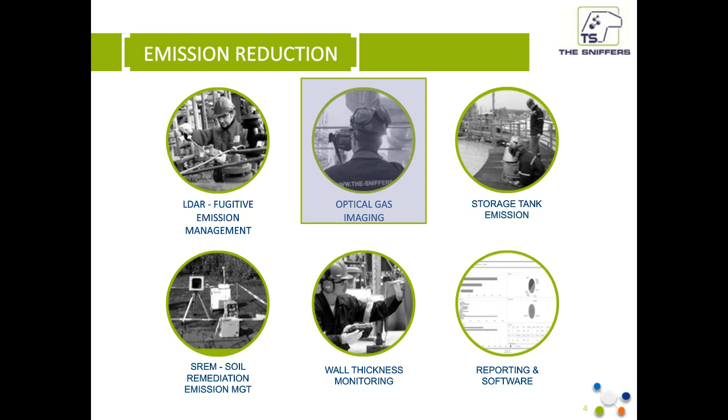Dear audience, welcome to this webinar of the Sniffers, in which we will focus on tank inspection. The Sniffers are active in different areas, such as pipeline integrity, energy savings, and emission reduction. It is in this last domain, emission reduction, that today's presentation is situated. Within the emission reduction part, optical gas imaging is just one area.

Optical gas imaging means that an infrared camera is used to perform gas leak detection. The camera makes it possible to really visualize the gas as a cloud. This provides visual evidence, and it also makes it possible to detect large leaks quickly. The camera is also often used to perform a quick scan after shutdown to quickly detect incomplete repair or inaccuracies.

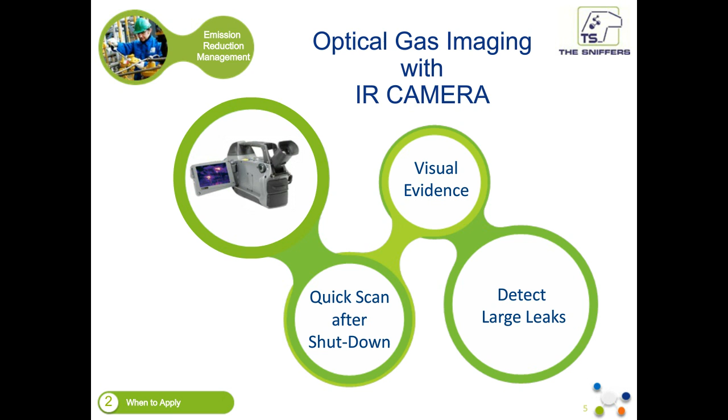What is the principle of OGI, or optical gas imaging? Our camera, the camera of the Sniffers, detects volatile organic compounds, or VOC. Most VOC absorb infrared waves. Certain wavelengths are absorbed more than others, and that's what the principle of the camera is based on. CH bonds of organic molecules have a large absorption band with high intensity around 3 to 5 micrometers. As such, this is an important wavelength window for organic compounds which are found in refineries and chemical companies.

The filter of the camera only transmits this region of the electromagnetic spectrum. It is exactly because a certain part of the infrared radiation of the background is absorbed by the gas cloud that a difference is created between the background and the gas cloud. This difference makes the leaks visible. As such, the gas leaks are visualized by the camera as dark or white clouds.

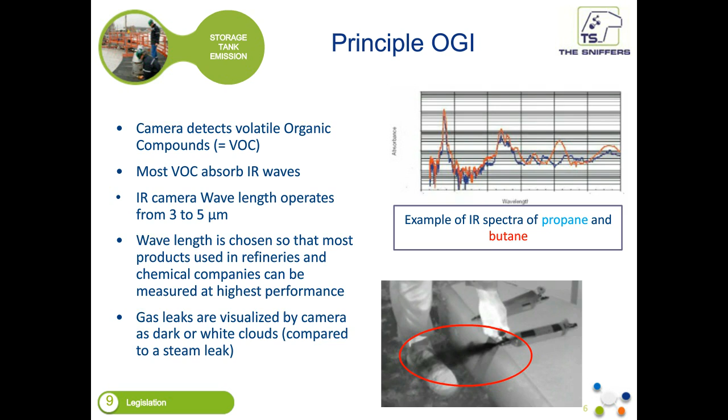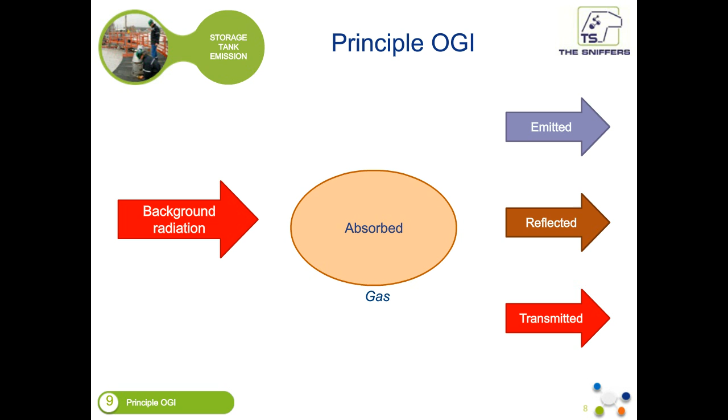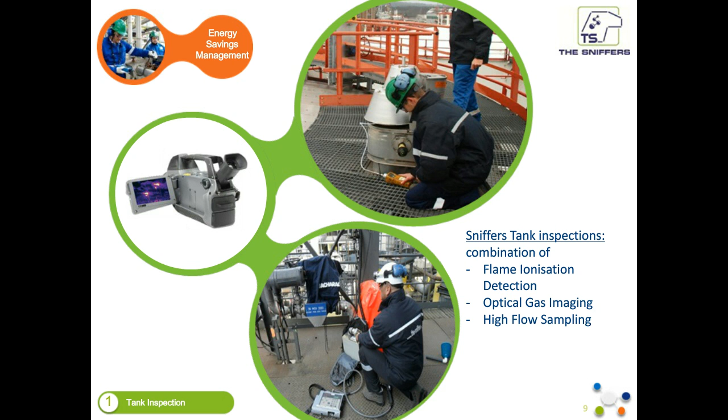Sniffers tank inspections mostly comprise a combination of flame ionization detection, optical gas imaging, and also a technique called high-flow sampling, which is actually a technique based on bagging. In the past, there were no real guidelines for the use of the camera, but recently a team sat together in the Netherlands and constructed the so-called NTA 8399. NTA stands for Nederlands Technische Afspraak, which is in English Dutch Technical Guidelines.

The NTA 8399 is a guideline for detection of diffuse VOC leaks with OGI. So it explains how the camera should be used in practice when you go to the field. It is actually not specific for tank inspection, but in the attachment it focuses on tank inspection, and it also gives an example for a tank inspection form. The Sniffers follow these guidelines during their tank inspection programs.

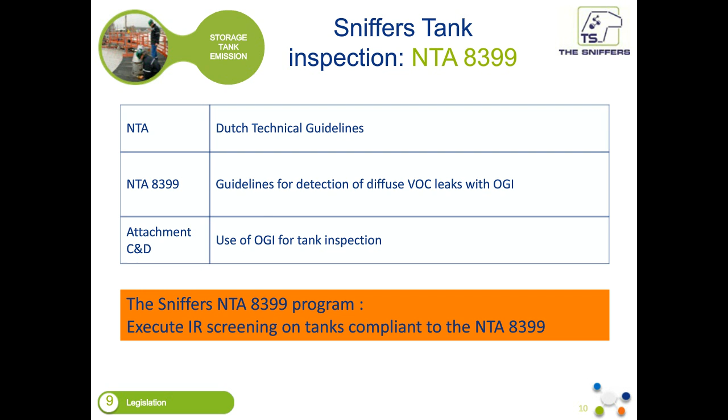So the NTA 8399 are guidelines for detection of diffuse VOC emissions with optical gas imaging, OGI. It focuses on portable, passive optical camera systems visualizing VOC in real time. Safety, environment, and loss of product are main driving forces for the application of OGI, and it is important to stress that it is a qualitative approach, not quantitative.

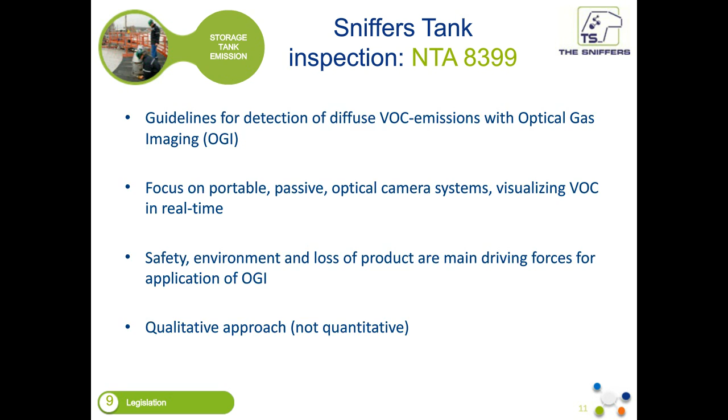Advantages of OGI on storage tanks are reduced monitoring time. You can quickly monitor several tanks, especially compared to FID monitoring, such as sniffing. You have images of registration, including date and time, which includes a provability factor. You can also reveal emission indications at unexpected locations. And there is also an important health factor, because you can monitor from a distance.

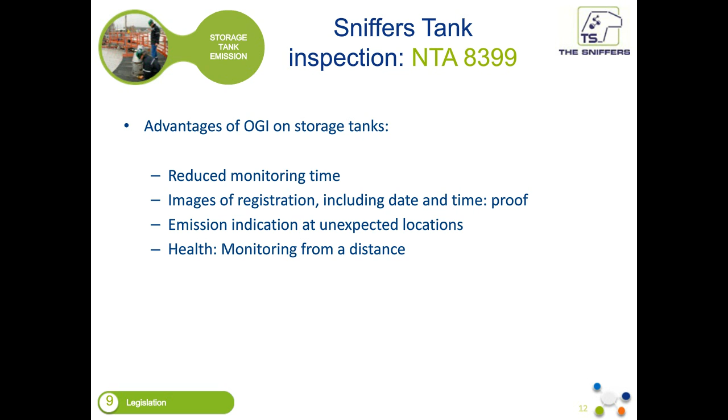So how is this Sniffers tank inspection program constructed? In the preparation phase, we request the location plan of the tanks. We request the products that are present in the tanks at the time of the measurement and also the safety data sheets. And we check whether products are measurable by OGI, so if they can be detected by the camera.

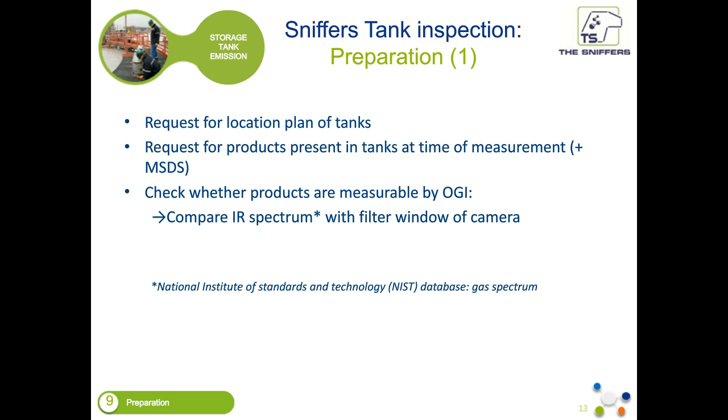We do this by looking for a spectrum of the compounds of interest in the NIST database on the internet. And we look at the window of the filter of the camera, which is between 3.2 to 3.4 micrometers. So we look if there is a strong absorption band. If that is the case, it is very likely that the compound will be detectable with the camera.

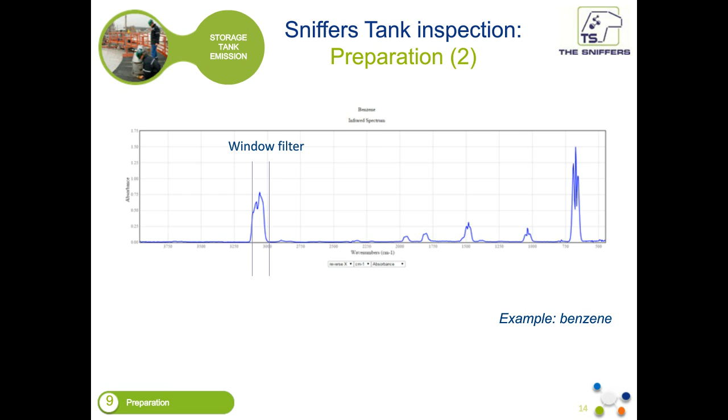How is the program executed? The tanks that are part of the scope are screened by checking all possible emission sources with the camera. When no emission indications are observed, an overview video is made of the tank roof in 3 different modes, namely the visual mode, just a movie, the normal infrared mode, and also the high sensitivity mode, which is very difficult to look at, but which makes the leak very clearly visible.

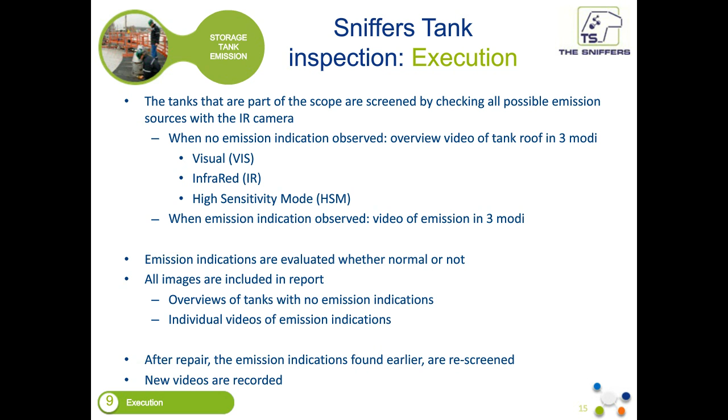When an emission indication is observed, videos are also made of this emission in the 3 different modes. Emission indications are evaluated, whether they are normal or not. All images are included in the report: overviews of tanks with no emission indications, as well as individual videos of emission indications. After repair, the emission indications which were found earlier are rescreened and new videos are recorded.

This is an example of a tank inspection form. The blue cells contain information that is collected in the preparation phase, so before the actual project. In the green cells, information is collected during the project, so on site. On this form, all the information is also collected about the sources that were screened, and it is indicated if they showed emissions or not. It is also indicated which movies correspond to which emissions, and which sources didn't show emissions.

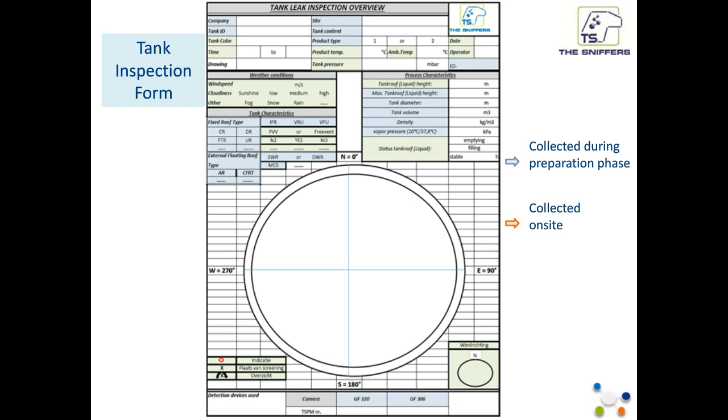Now I am briefly going to show some study cases, mainly roof inspections. Here is an example of a project which we have performed. On this tank inspection form, you can see that 5 sources were screened, and only 1 showed an emission indication, which was the red dot on the inspection form. This was a deck leg, and this is the one that is pointed towards on the pictures.

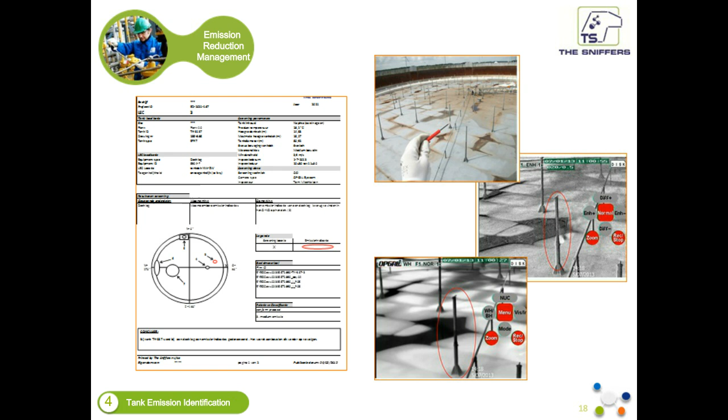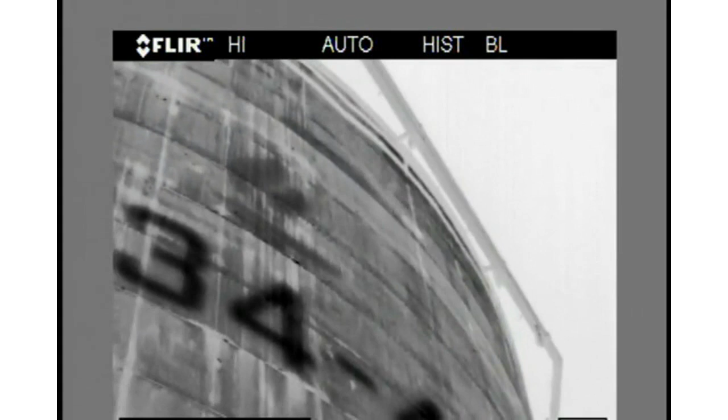Here, a clear emission is shown of an equipment on a tank. These are the type of videos that we will provide together with the report, and the names of the files are indicated on the tank inspection forms. On this video, it is clearly visible that the tank shell is leaking. You see the white clouds disappearing from the tank shell.

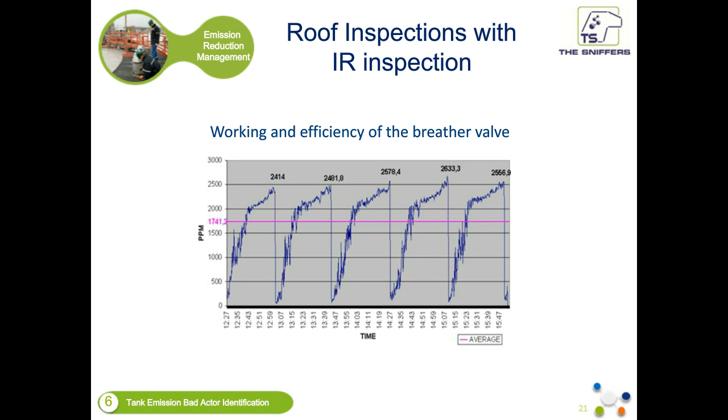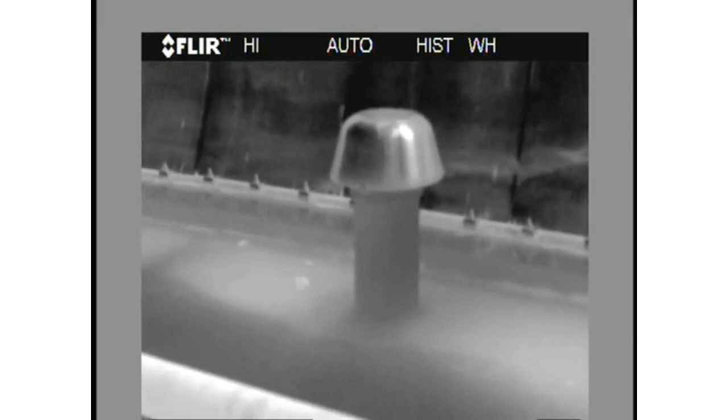In another case study, we checked the working and efficiency of a breather valve. We first measured this breather valve with an FID, and we got the profile which is shown in the slide. And this is not a properly working breather valve. The emission was also shown on an infrared video, which will be shown in the next slide. And we saw that after repair, the breather valve was only emitting when it was opening.

Also, floating roofs can be inspected with the camera without a problem. Here, different equipment types are shown. It is best if we can go on the tank, but if it's not possible, it's easy to indicate emissions from the platform.

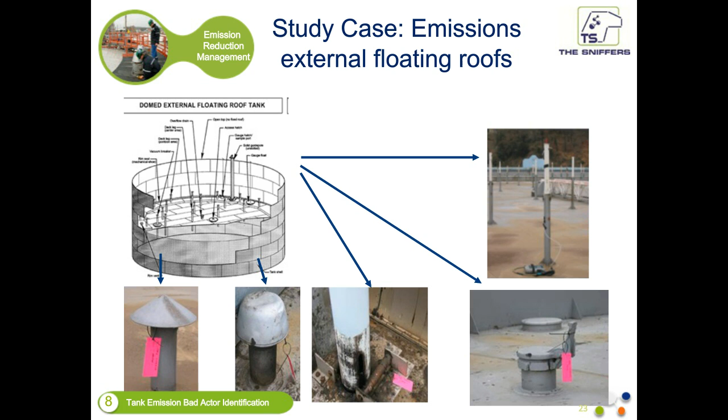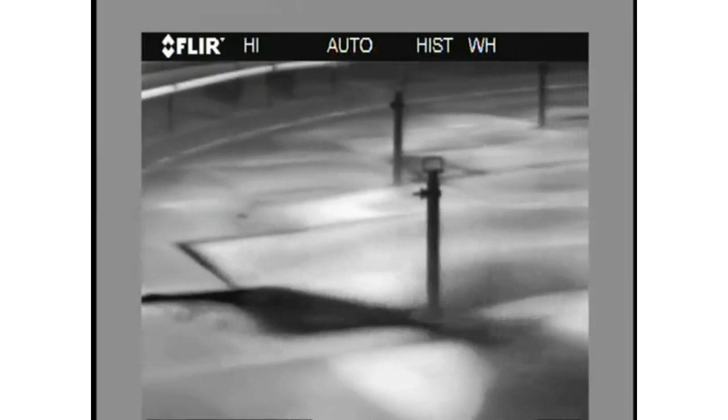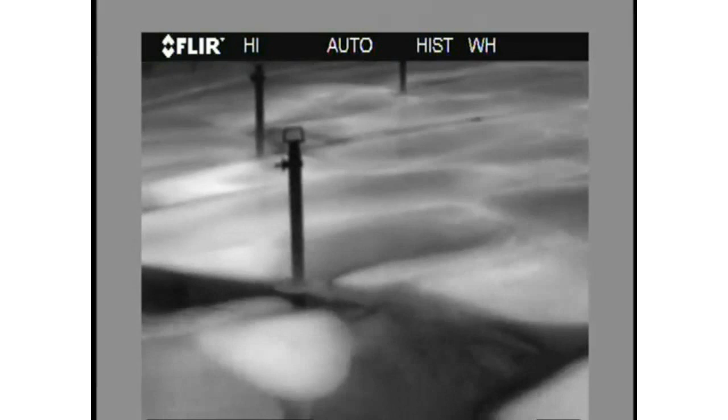What we see here is the roof, and it's welded together. And what you clearly can see is that the welding is leaking. So again, we see that the optical gas imaging camera is a very, very powerful tool to detect the leaks. With the camera, you can do a fast screening on your tanks, and you can immediately spot a lot of leaks and a lot of indications of problems.

This, for example, is a hatch of a floating roof. So it's like a floating container that's keeping the roof above the liquid. Normally it should not leak, but with the camera you can see immediately that it's leaking. This is what we call the high sensitive mode. We always film in 3 modes: the visual, the normal, and the high sensitivity mode.

What we see here is again a sealing of a tank. Again, we see the normal picture. We don't see any leaks. Now we're screening in the normal mode. We see a cloud coming up, like small leakages, and then we see the high sensitive mode, which is much better and much more fine-tuned to find leaks on tanks. So here we see nicely a smaller leak on the sealing of a floating roof tank.

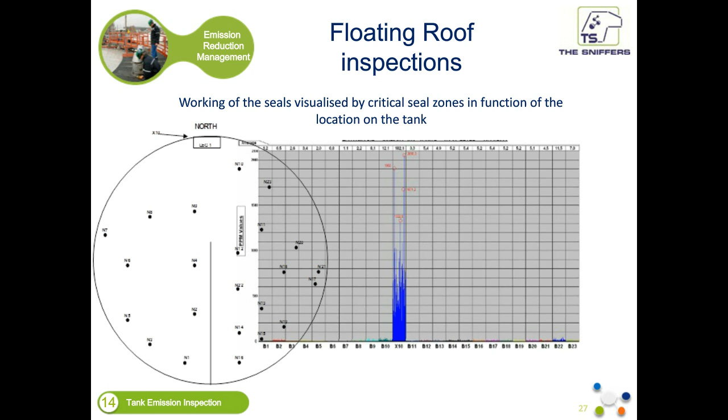In this study case, we walked around the tank with a flame ionization detector, and at a certain point we clearly saw an elevation of the concentrations on the FID, which meant that there was an emission coming from the seal of the tank. Looking with the camera at the same point, we got a clear image of how bad this emission was, which will be shown in the next video. Here it is.

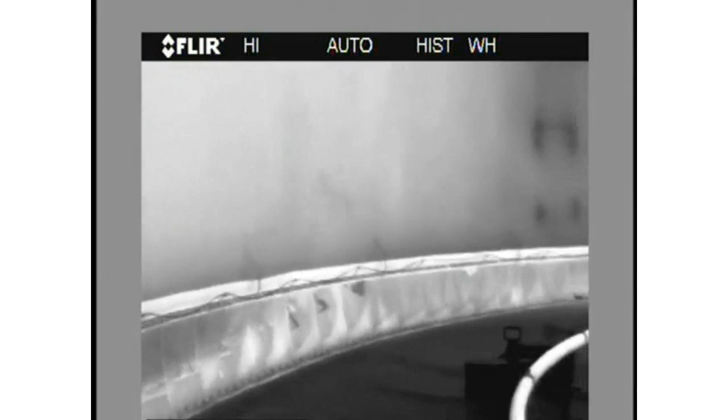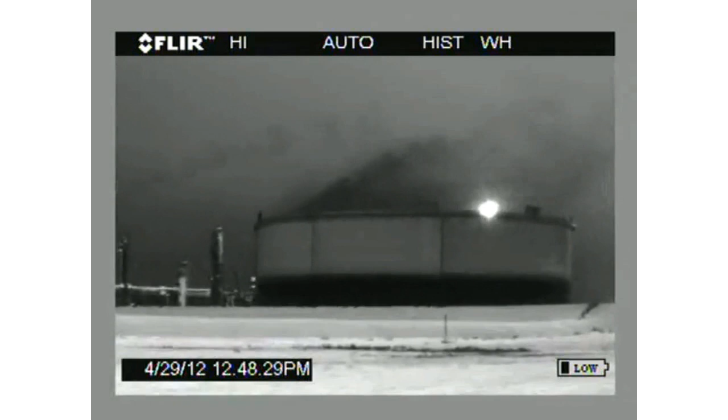In the next video, we will see a tank with a huge problem, but there was a reason for this. Some time ago, a truck was burning next to the tank, and it deformed the tank shell. But we observed that when the tank roof was at a certain height, there was no problem, but at another height, a huge emission was coming from the tank.

After the OGI, I will focus on high volume sampling or high flow sampling. This is a technique based on bagging, but the difference with vacuum bagging is that in high flow sampling, a flow is created which gently sucks the surroundings of the leaking equipment through the instrument. Mostly this technique is used after leak detection. It's not a leak detection technique because it takes too long to detect all the leaks, but it is mostly used to quantify the leaks after leak detection.

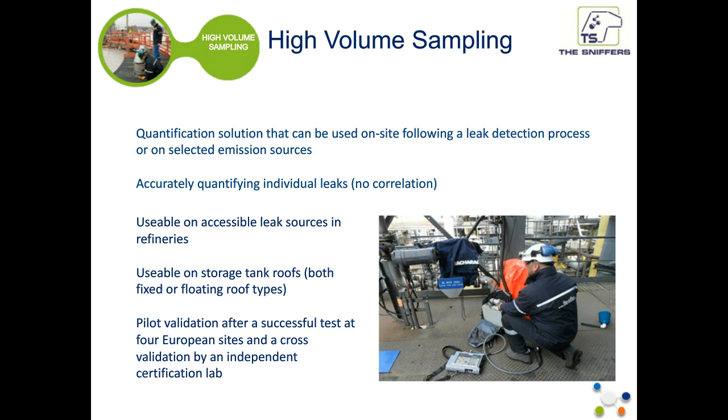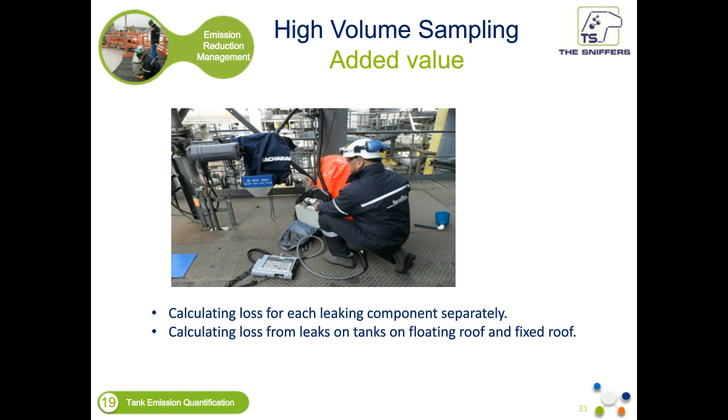The added value of high volume sampling is that losses can be calculated for each leaking component separately, and it is possible to calculate exact emission of tanks with floating roofs and fixed roofs. The method is as follows. After bagging the equipment, the leaking gas is drawn through the instrument together with some surrounding air at a certain known flow. This flow is set on the instrument, and it is important that this flow is known to be able to calculate the exact emission afterwards. So the gas leak is drawn through the instrument, and at the exhaust of the instrument we measure the concentration with a flame ionization detector.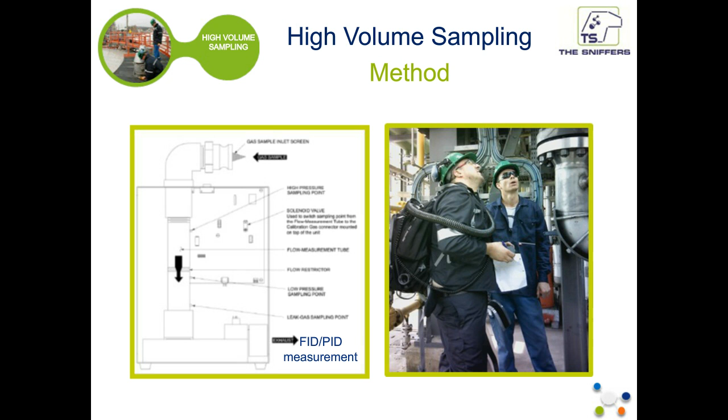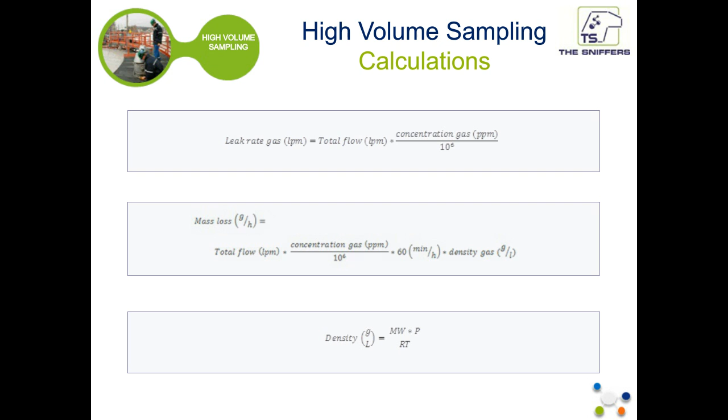If you only want to know volume-based emission losses, you can multiply the total flow which you have set on the instrument with the concentration fraction of the gas measured at the exhaust of the instrument. If you want to know mass emission, you have to multiply this volume-based emission with the density of the gas. Knowing the components which are in the vapors, you know the molecular weight, and it is easy to calculate the density. Having calculated all these details, we provide you such a report, giving you for each equipment on the tank the exact mass emission which is escaping from your tank.

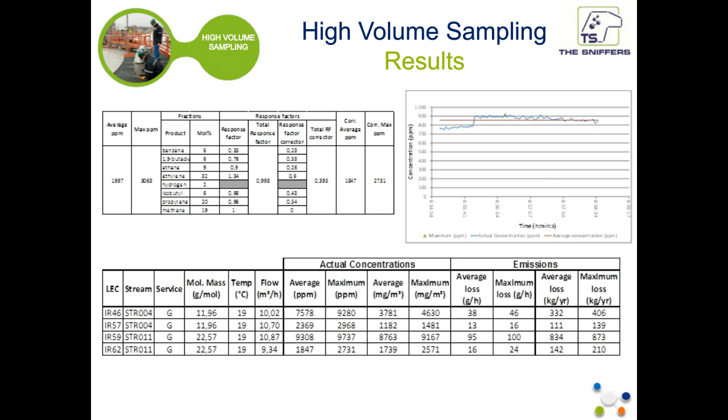So I will be telling you something about energy savings on tanks. So what are the services that the Sniffers provides for energy saving services on tanks? Well, first of all, steam loss management. We have a full program to manage your steam loss and to help you reduce your steam losses in your tank farm. Flare loss management. We have a full program again also for the flare or vent losses in the tank farm, especially for natural gas or ethylene or lighter gases.

Further, we have thermographic integrity inspections, so we do all kinds of infrared monitoring to detect level in the tanks, insulation problems, all kinds of hotspots monitoring. And of course, we also have a program for compressed air and vacuum leak detection, and also nitrogen losses. So it's a specialized ultrasound monitoring to detect all your losses in your tank farm. Of course, for every service we deliver, we have a specialized and self-built software. Everything is built in SQL, so professional, and it has no limits of data.

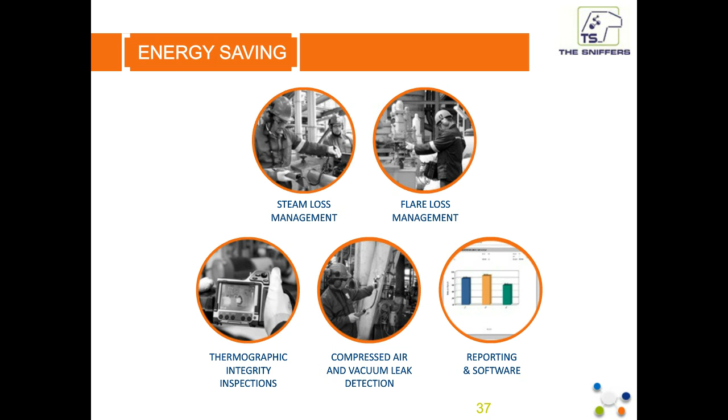We're going to start with steam losses in a tank farm. So what are steam losses? Well, steam losses are caused by defective steam traps, bypasses, process valves that start discharging, all kinds of visual leaks coming from all kinds of steam lines. So what we're trying to do is make as full and complete a monitoring program as possible to manage your steam losses in your plants.

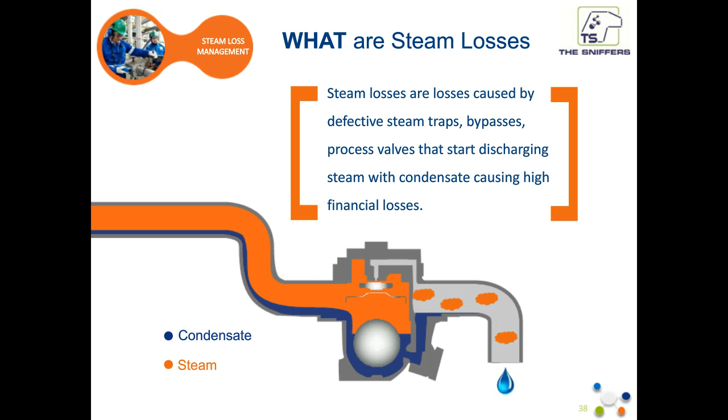So what kind of equipment are we using? Well, we are combining three techniques, three different equipments. First of all, we use the ultrasound measurements. The best way to measure a steam trap is definitely ultrasound. Easy and fast to detect internal leaks of your steam trap or your bypasses. And it makes it also possible to do a quantification.

So we know what type of steam trap it is. We know the technical specifications of the orifice in the steam trap. We know the pressure on the steam line. We know what is the type of steam trap, and so we can calculate the exact loss on the steam trap when it's defective, when it's leaking. So this is the reason why we use these ultrasound measurements.

We combine it always with temperature. We use an infrared pyrometer, and of course it gives you indication if the steam trap is cold or hot. And further, we also use a thermal camera, and the thermal camera is an extra addition. It's like a visual proof to see if there are anywhere open bypasses in the plant.

So steam traps have bypasses or larger bypasses in the process system, but also condensate lines, if they're blocked. We can screen for certain heat exchangers with steam. So all kinds of process screening and analyzing is covered.

So how do we start a program? Well, first of all, we come to your site, we collect all the data, we collect all the P&IDs of all the steam traps. We make a calculation, we make an identification, and then we start in the field. So every steam trap that we spot gets a full inventory, what kind of steam trap it is, so all the information to calculate the losses.

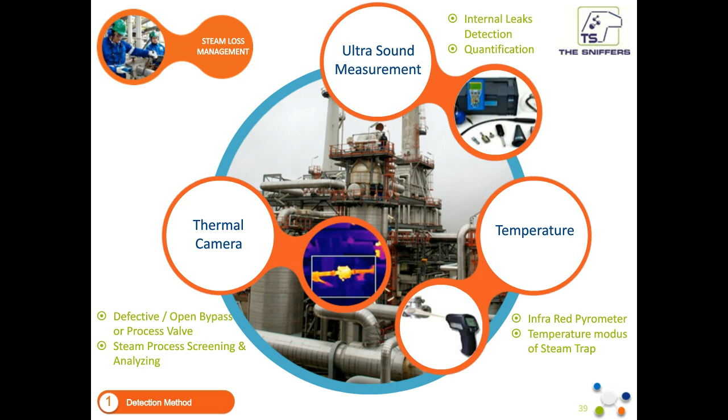Here in the next slide, we see a case study. This is about a tank farm, and it's a tank farm part of a refinery. So we see around 2,000 steam traps. This is pretty high for a tank farm. But again, in a refinery, you have bitumen, you have asphalt, so a lot of steam traps are needed to heat the tanks. So here you had around 2,000 steam traps.

And if we see the statuses, you see the status okay. This means the trap is working normally. You see not okay leaking. This means that the trap, of course, is leaking. But you have even more statuses to determine the status of the traps. You have DG, like defective gaskets. This means that the trap is leaking externally through the flange. You have cold. That means that the trap is cold and not working normally. You have out of order, valve closed, failed closed, and no status possible.

So if we look at this case study, we see around 2,000 traps, of which around 1,600 work normally. So around 80% is working fine. This is quite a high number. We see 134 leaking traps of the 2,000, meaning around 7% of the steam traps are leaking. And this is not a very high number. What we see generally is between 5 and 30% of leaking steam traps in a plant, according to the type of steam trap being used.

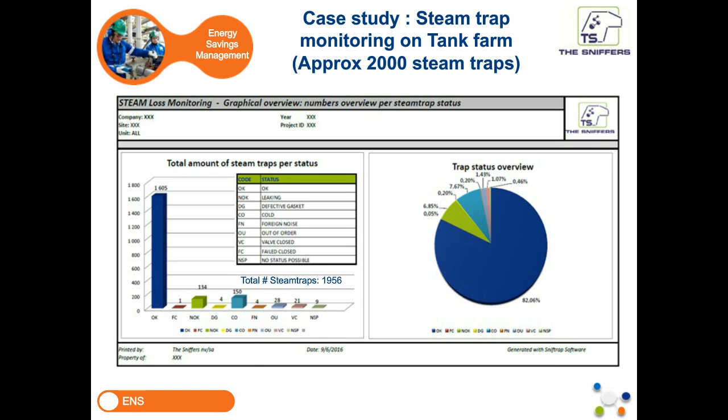Around 150 are cold, also around 7%. So this is also a high number of cold and non-working steam traps. Of these 2,000 steam traps, you remember that we have 134 leaking steam traps. These are causing around 9,000 tons a year of loss in the plant. So if you calculate it per steam trap, it's an average of 67 tons per leaking trap, meaning per leaking steam trap you lose around 2,000 to 3,000 euros. That's quite a high number.

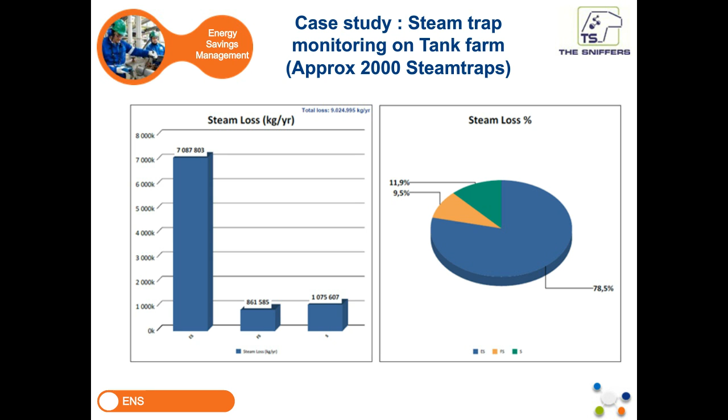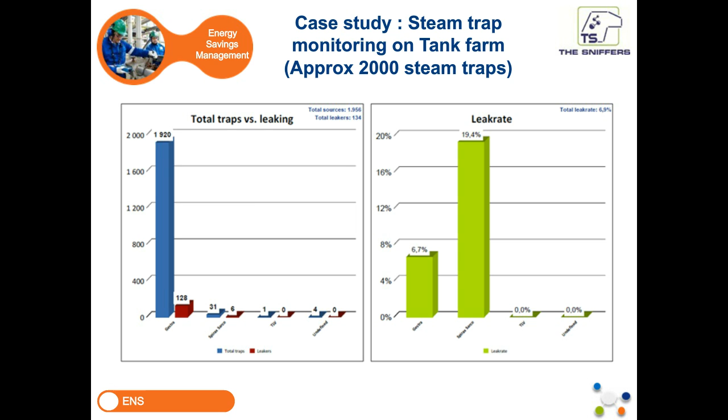Moving to the financial analysis, we remember that we have around 9,000 tons a year loss. If you calculate that to financial loss, you're around 270,000 euros per year loss just by a tank farm. That's a high amount of steam loss, so a high amount of financial loss.

Here we made a calculation on how fast a project repays itself within the year. In the first graph, cost of steam loss is 270,000 euros. The second one is cost of new traps, meaning if I had to replace the 134 traps, it would cost around $53,000 for all the new equipment. This is calculated on the existing type, so the software knows this type costs so much money, and we can calculate it also by the software.

The maintenance cost is to replace all the traps by a maintenance department. Then the last part is the management program cost, what the program that we are doing for the monitoring, so the whole inventory and the whole measuring campaign with full analysis and quick scan of the site was around $25,000 for 2,000 steam traps. We see here that the payback factor is around 3.2, meaning in 4 months after repair, everything is already paid back. So a high financial payback.

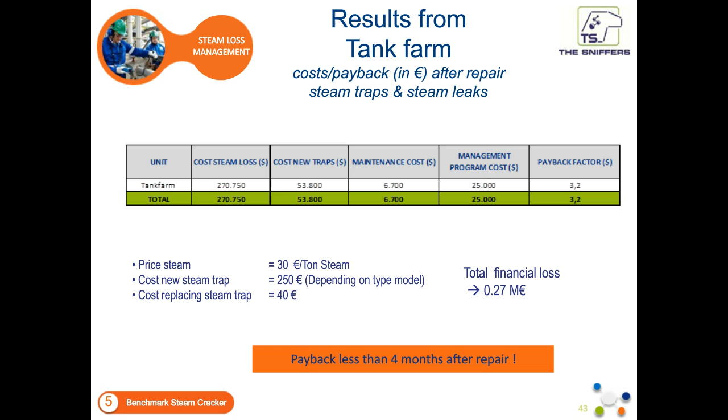When we did the screening, we saw that the bypass was leaking, so we went to the control room. We told them, okay, this bypass is leaking, and they said no, it's not leaking. We opened it because the valve, the steam trap, was too small. So you see what is already known a long time in operations.

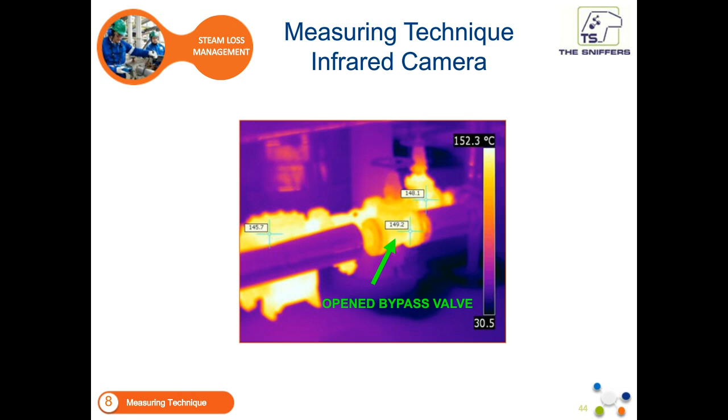They just opened the valve of 4 inches and lost around 2,000 euros a day. What in this situation they just had to do was buy a new steam trap, a better one with a higher capacity, for example a floating trap. But in this case, they just opened the valve because it's very easy, of course. Again, 2,000 euros a day loss in this example.

In this case also, all the remarks during the quick scan are being listed, meaning our guys are going in the field, doing the inventory and the monitoring, and everything they see and pick up, they take pictures and make a movie of it, and report it to you directly into the report.

What we see here is a steam trap, two larger ones coming from a tank. The tank is internally traced, then it goes to the steam trap, and then to the condensate line. The connection between the condensate line is not correctly performed, meaning normally it should go on top of it, and here it's below. So all the condensate is running downwards, coming from the condensate line to the ball float traps that you see here, and it gives water hammering or implosions. I will show you a movie about it.

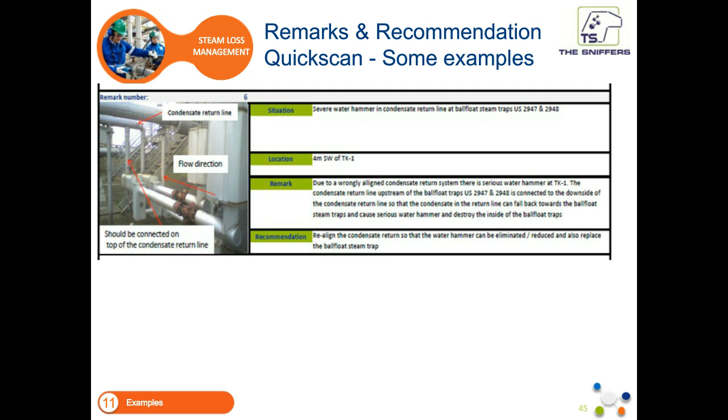So also our guys will make a movie, and they will give it to you afterwards. So everything here is...

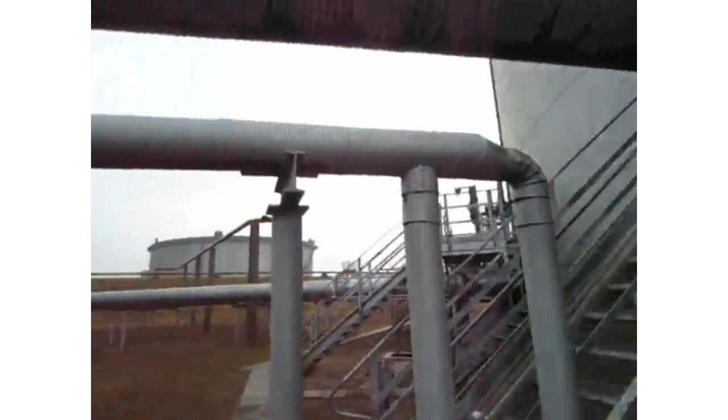You can hear the water hammering, very fine, so you hear a very large noise. You see here the condensate line going to the steam trap, and both steam traps are leaking. They're blowing steam into the system, and you get implosion of the steam bubbles into the cold condensate. Now we look up and you see it goes directly from beneath, but normally it should go on top of the line, so that there's no condensate returning to the steam trap.

So this is a bad installation, and this is one of the things that we are reporting on a daily basis when we go into the field. A very nice example in a tank farm with a larger steam trap.

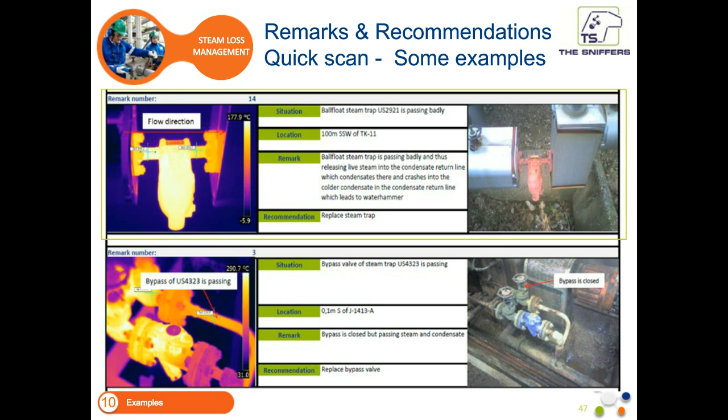And this is what we call the quick scan. When everything is finished, the project is finished, you will get detailed repair orders, a full report, graphs, an overview, and a full analysis of steam trap and tagging of the leaks. So everything is in the report.

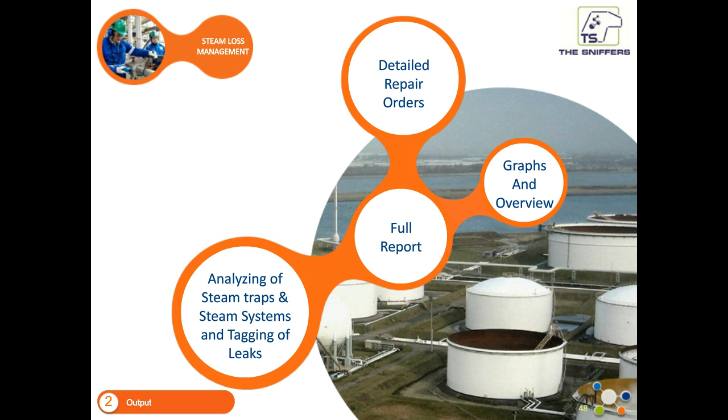The second thing we're going to discuss is the flare or vent losses. What are flare or vent losses? Well, it's an internal passing of a valve. In a flare system or a vent system, you have lines between the vent or the flare and the system it protects, and normally it is closed. For example, in a tank farm, you have a few hundred points between the flare and the tanks that it protects. And it can be that they're leaking internally, meaning it's going to the vent or to the flare because of a leak. Normally they're closed, but in certain occasions they can leak.

This is what we are going to screen for, and what we made a full program for. We will be monitoring all different types of points between the flare and the system, using ultrasound to detect if they're leaking or not.

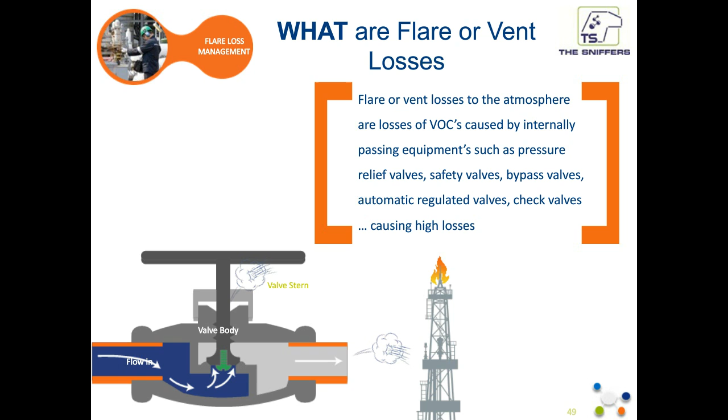So again, here we make a full program. We start with a preparation. We will go to your site, collect all the P&IDs, and detect all the possible flare points. We will go on site, make a full inventory, do the measurements, and again, you will get the report and all the recommendations that we have for you.

So what are the benefits? Why should you do it? You know where your losses are — we can say exactly it's this relief valve with number A, or this control valve number B. Of course, we also care about the environment, since these leaks could cause huge emissions to the flare, to the stack.

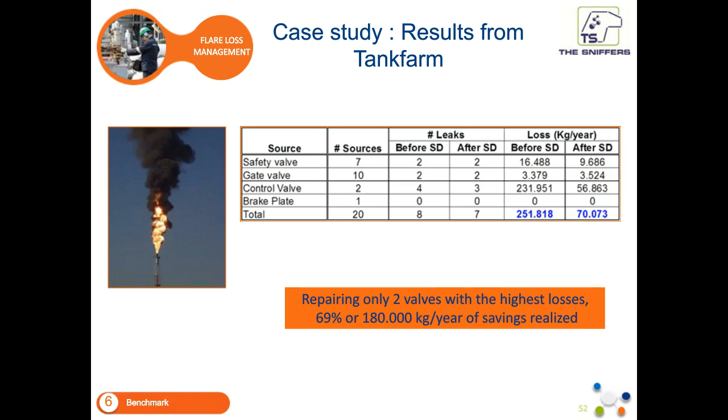This is another full tank farm that we did, also from a refinery. We had around 89 sources in total: 14 control valves, 41 hand valves, and 34 relief valves. We found around 9 leaking ones. The leak rate was pretty high, so 10%. And again, the emissions were around 20,000 kilograms a year.

Not so high, but again, small leaks become big leaks. So it's important to tackle your leaks when they're small. In this case, around 9 leaks could be repaired before they become very large leaks.

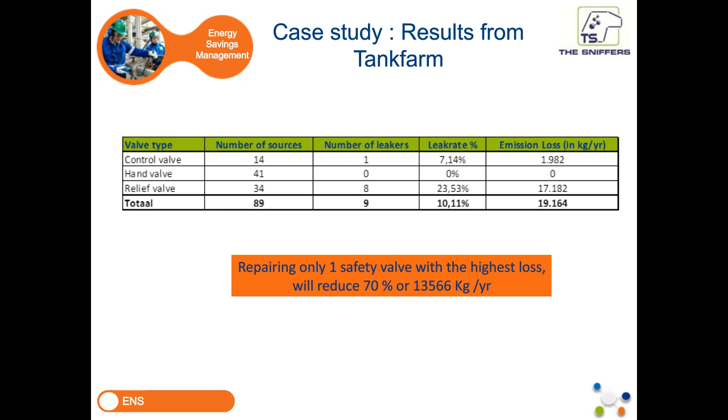Also, if we look at emissions per chemical product in kilograms a year, we just saw that we've been monitoring all kinds of flare points. In this case, we can also give you the exact loss on the products. You see here, for example, butane — the largest leak here was ethylene, around 14,000, so 75% of the full leaks was ethylene. The stream doesn't have to be 100% pure, because the software can recalculate all the different streams, meaning if you have a stream, for example, 30% propane and 70% ethylene, it can exactly calculate the loss on this.

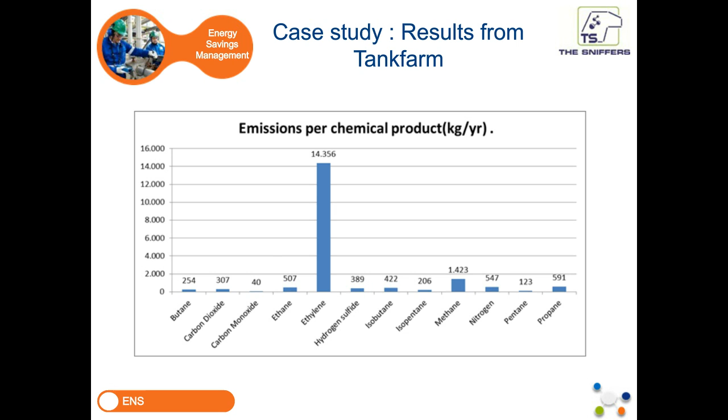Again, you get full detailed repair orders. You get a full report — for every leak, there's a picture, and an overview of the P&ID. You get the number, the product stream, and the localization — for example, 2 meters from vessel A, height 2 meters. So all the information that maintenance needs is there in the report.

Of course, you get a full mapping of all your internal valves in your tank farm, with signalization of all the leaks. Every leak gets a very colorful green tag so you immediately know, okay, this relief valve is leaking — so you cannot miss the leak afterwards.